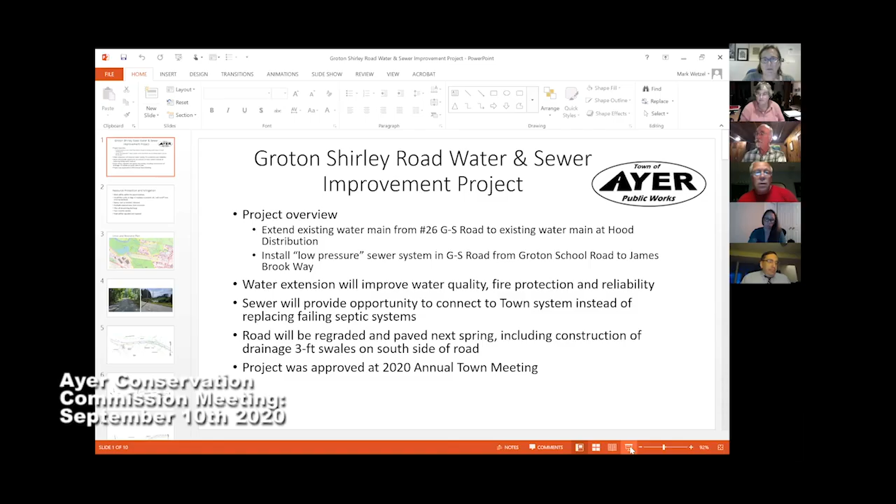Let's move on to our first public hearing, notice of intent in Groton Shirley Road, Ayer, DPW. We still have no DEP file number. Mark, did you want to give us a presentation, please? Sure, let me see if I can do this. There we go, thank you very much.

This project is basically Groton Shirley Road. I have all the roads' pavement conditions rated in Ayer, and Groton Shirley Road is by far the worst if you've ever driven down it. So we've put off repaving it because we need to do some water and sewer improvements up there. This project involves extending the water main from the end of the water main, which is approximately house number 26, down to the driveway of the Hood Distribution Center. I think it's about 2,700 feet of water main.

The residents also petitioned to have sewer installed in the road because a number of them have failing septic systems, and because of soils and wetlands and groundwater table, it's very expensive to repair them. So they put a petition together. We had an article at town meeting, and it was approved to put in a sewer system.

We looked at the different alternatives, and the selected alternative, which was most cost effective, is what we call a low pressure system, where basically everybody has a little pump in their front lawn that pumps into a sewer force main out into the road. The sewer size depends on where you are on the street because it gets progressively bigger as it moves up the road. We would start the sewer at the James Brook Way intersection and install it up to Groton School Road and tie into the gravity sewer at that point.

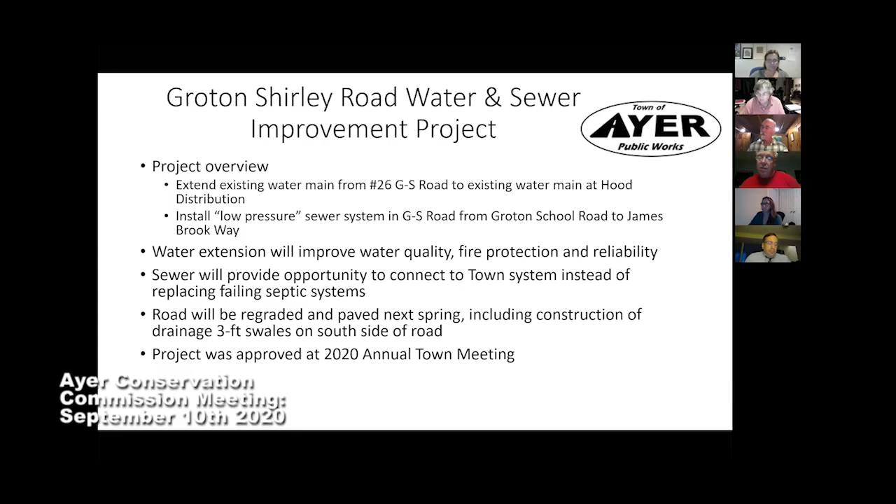So some of the resource protection mitigation: the work will be within the paved roadway.

We're proposing to install wattles or filter socks at the edge of the road to prevent silt and soil runoff from entering the wetlands. We'll sweep the road as needed once it becomes muddy. Material will be stockpiled away from resources, and any dewatering discharge will be filtered. We'll pave the trenches weekly, do temporary patches this fall, and regrade the road in the spring.

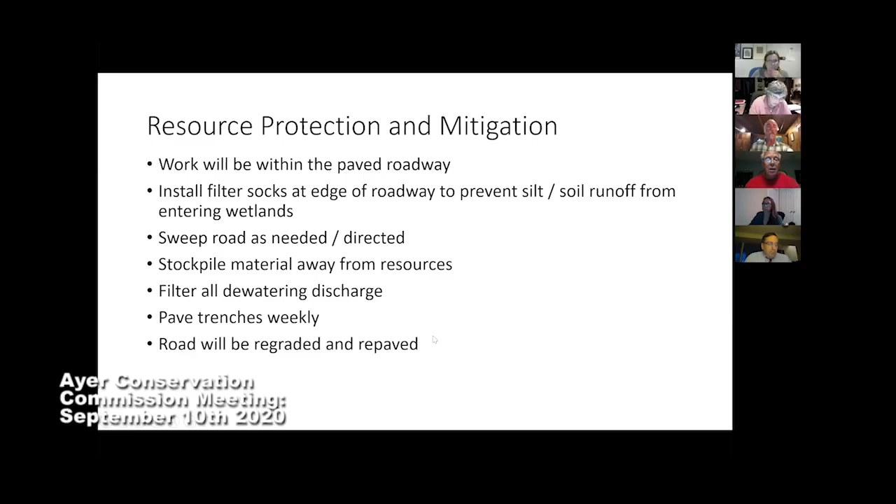Here's the locus. So the Hood distribution driveway is down in this area.

We're starting up at Groton School Road and installing the sewer down to about this point at James Brook Way. We do have an alternate because we don't have enough funding, so we'll go as far as we can. These houses here probably don't need the sewer installed, and likely won't connect because of the cost, but we do have an option if we go to this point.

Interestingly, a couple weeks ago I got a call from the town of Groton, which is looking to put in some elderly housing up in this area, wondering if they could tie in with the sewer. That's something we're talking about, but it's a long way off and there are other issues related to it.

The water main will pick it up at this location, run down the road, and tie in with this driveway here.

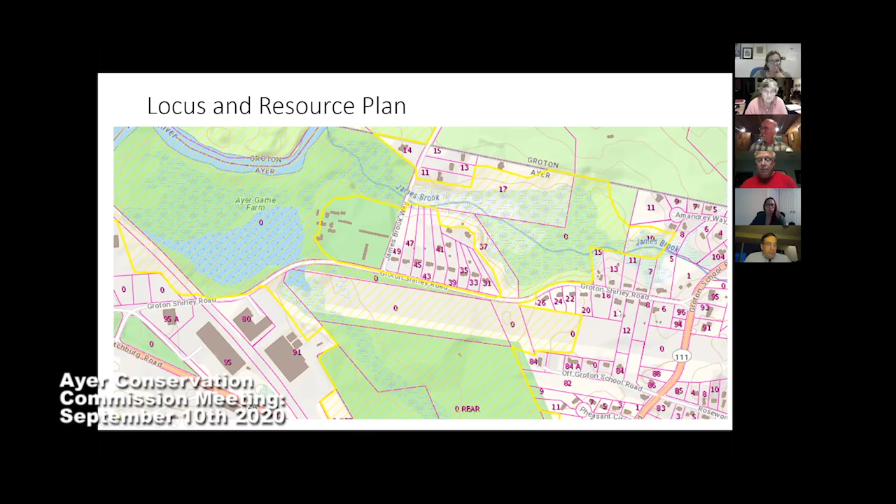So these are the design drawings for the project, and they run from west to east. Here's the Hood distribution driveway — we'll tie into the existing water main here and run down the south side of the road.

This is the color plan. You can see green is the flagged wetlands, and we also show the buffer zone where we are within the buffer zone.

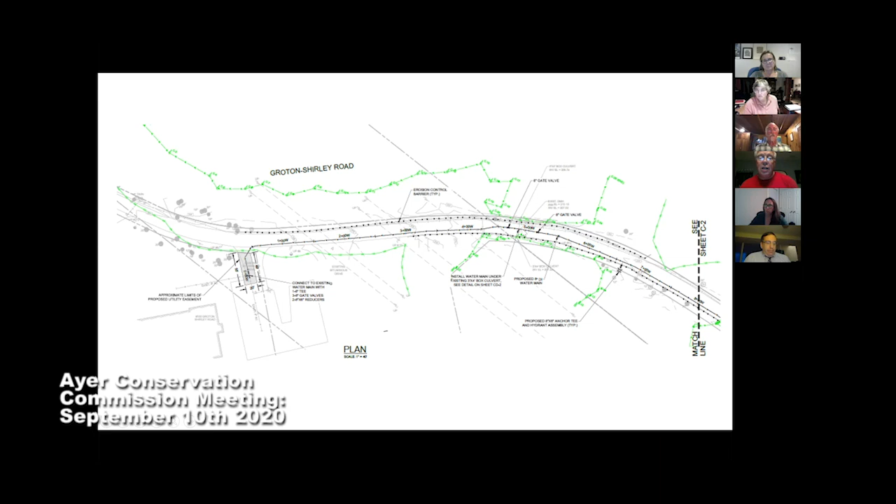This is where the culvert crossing is — we'll excavate under the culvert and pipe at that point. As we move down towards James Brook Way, you can see the wetlands now on this side of the road, and here's the buffer zone, so we are in the buffer zone.

At James Brook Way, we'll leave a stub in case we ever want to extend the water up James Brook Way. This is the location where the sewer is going to start running over towards Groton School Road, and the resource area here marks the end of the project.

Mark, you're kind of tailing off there. Can you — okay, can you hear me better? Yes. Thank you.

As we move towards Groton School Road, we've got the sewer on one side and the water on the other. We need to keep a minimum of 10-foot separation as we get up to this, the last house on the street, and that's where the water main will end.

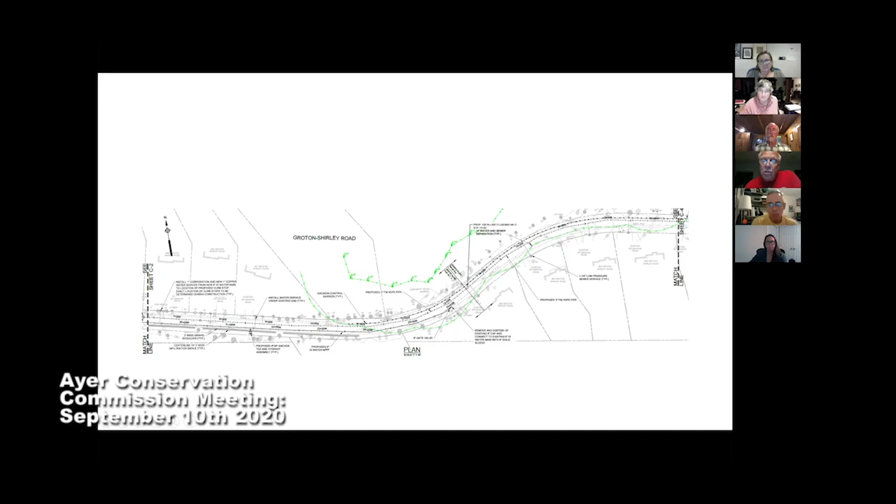We start picking up some wetlands on the north side of the road here, so we are in the buffer zone for most of this distance. Here's the last stretch going up to Groton School Road.

We will be replacing this culvert here — it needs to be replaced, so we'll put in a new ductile iron pipe with head walls on either side.

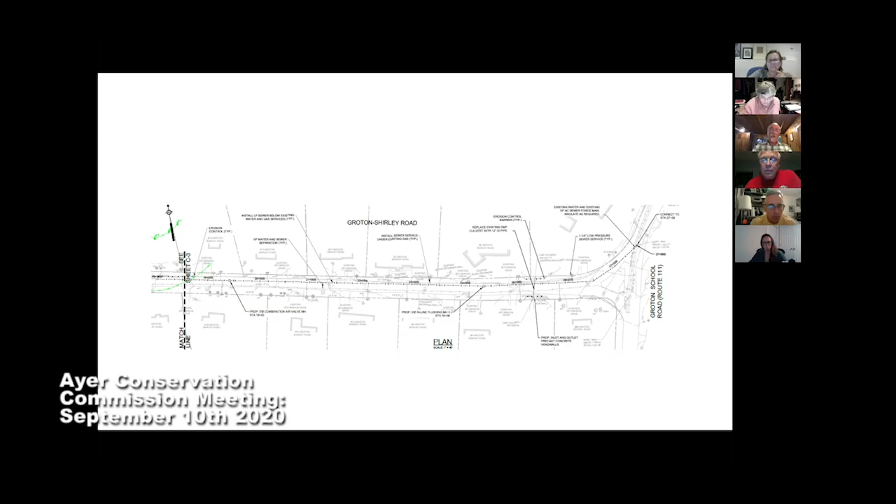But this is a pretty simple installation — contractors do this pretty regularly.

Mark, is that just going to be dug, or does that have to be like directional bored or anything? No, it's only about 6 feet, so they'll excavate on either side and just push a pipe through. Okay, pretty simple.

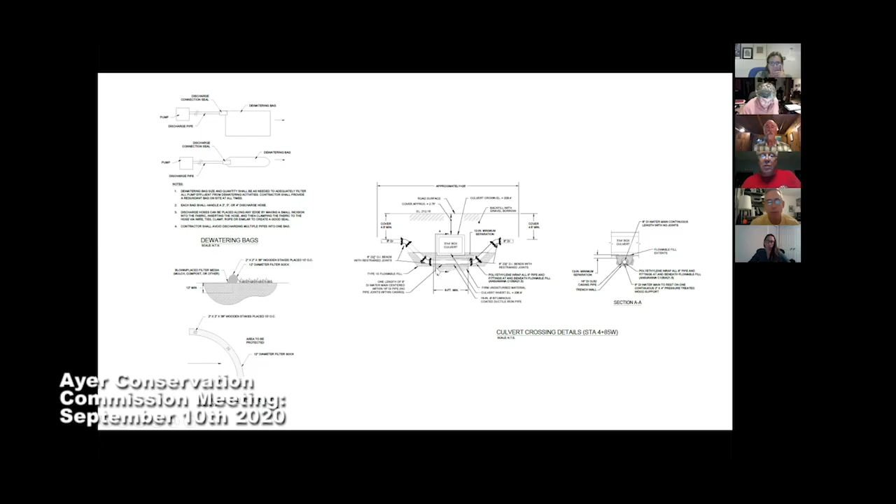Just so you know, we have a pretty detailed, about 250-page specification that the contractor has to follow, including a section on erosion and sediment control and a section on dewatering. So we have a lot of control over the protection of the environment and the resources on this project.

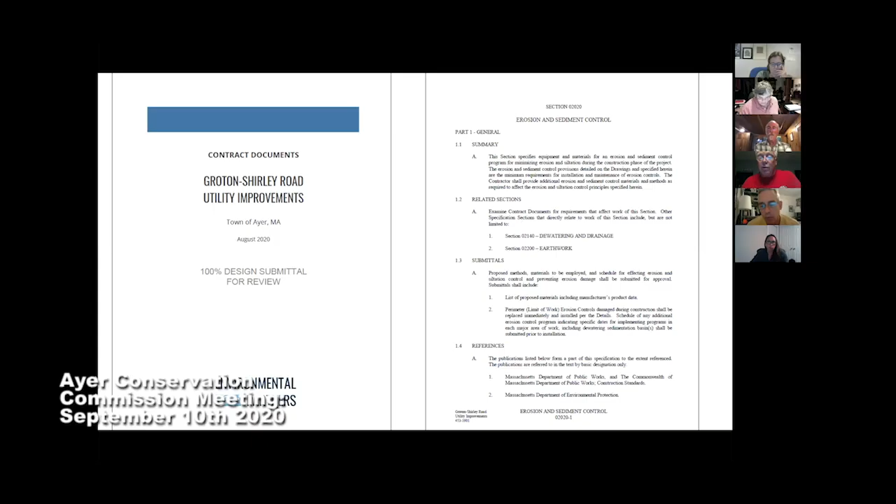And that's the end of the presentation on what we have planned. Let's see if I had any other notes I wanted to go over.

The schedule is, we're hoping to get started this fall. We do have to do the public bidding, and they'll get probably some of the pipe in, but depending on winter conditions, they may have to shut down for the winter and come back to finish in the spring.

Okay. Anything else? That's all I have. I can answer any questions. Are there any questions or discussion, concerns from commissioners or Joanne?

Well, I of course always have some, but I'll let everybody else go first. So Joanne, with regards to the document, the specifications that Mark just noted, have you in the past reviewed that already against our special conditions and things like that? Does everything line up, or are there things that are maybe not quite what we're looking for? I don't know if you've ever had a chance to look at that before.

I don't usually look at it that way. And this one, honestly, I have been so busy, I haven't really had a chance to dig into this too deeply. I'm a little concerned on this one. I've never actually seen a wetland line sketched out the way this one was presented to you, Mark Wetzel. That was pretty interesting. So, okay.

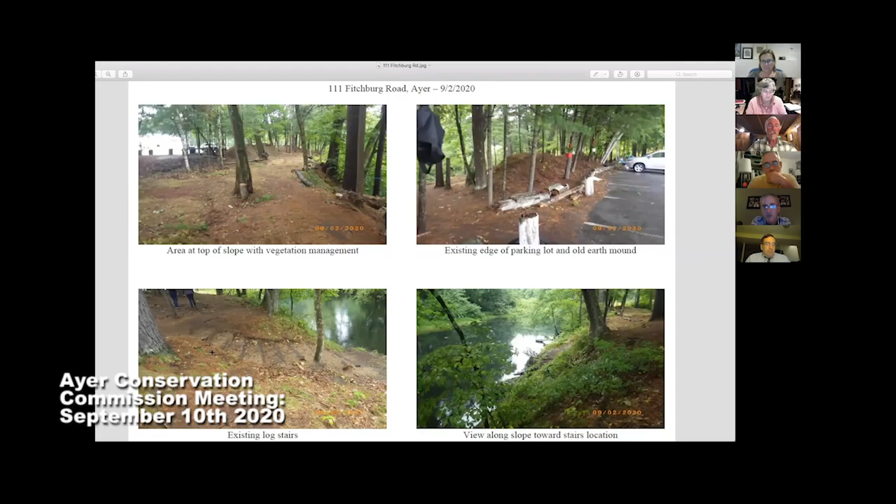So there's been a number of activities within jurisdictional areas. Basically this whole area we're talking about is in the riverfront, in the inner riparian for the most part, and also in the buffer zone. They didn't actually do any work on the bank of the river. They got close, but other than perhaps a little bit of vegetation cutting - I'm not entirely sure - they didn't do any physical alterations to the ground in there.

I then stepped back and looked at this work, and the other work they want to do, which is they'd like to put in some sort of fence railing at the top of the slope. This is a religious group, they have a lot of people out here at times, and part of their religious activities actually center on the water. You can see in the lower picture, which has a view over the stairs, they have several boats tied up - thank you, Joanne. So they'd like to get access to the water for recreation and also for religious purposes, as I understand it.

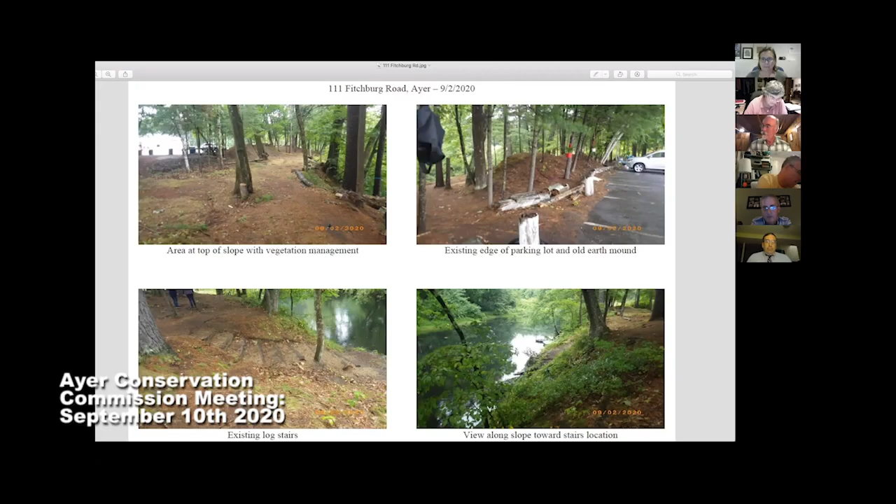Do we need to make a motion to continue this? It's a public meeting. Don't think we really need to continue it.

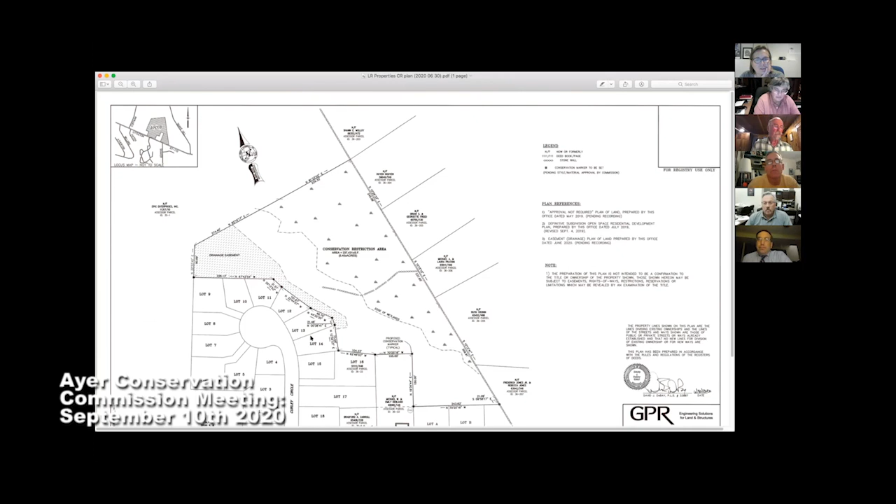I can, let's see, we also got the updated plan. Oh, and yet I sent myself the wrong one. So on the real plan, there's the easement to access the open space is right here between lots 13 and 14. So you could vote to approve this pending John Joya and Division of Conservation Services approving of the CR.

It would still have to be signed by the Board of Selectmen and the Secretary of the Executive Office of Energy and Environmental Affairs, and us as well, right? Oh yes, of course. Could we, if we did vote to give provisional approval, could we then individually show up at your window and sign then? Robert shaking his head, yes. Yeah.

May I just make one point of clarification? John Joya has to see the last final version of it. He's seen four or five versions of it all along the way and has been fine with it, so it's the last change he needs to see. He's very familiar with it. I wouldn't think he'd have an issue if you voted it tonight.

Robert? Mr. Chairman. Robert Pontbriand, the Ayer Town Manager. Thank you and the Commission. If I could just address you briefly, I echo what Joanne had said earlier. I appreciate all of her efforts, the town planner, town counsel's efforts, and everybody working to move this important project forward. As everybody knows, this is really the first OSRD for the town of Ayer.